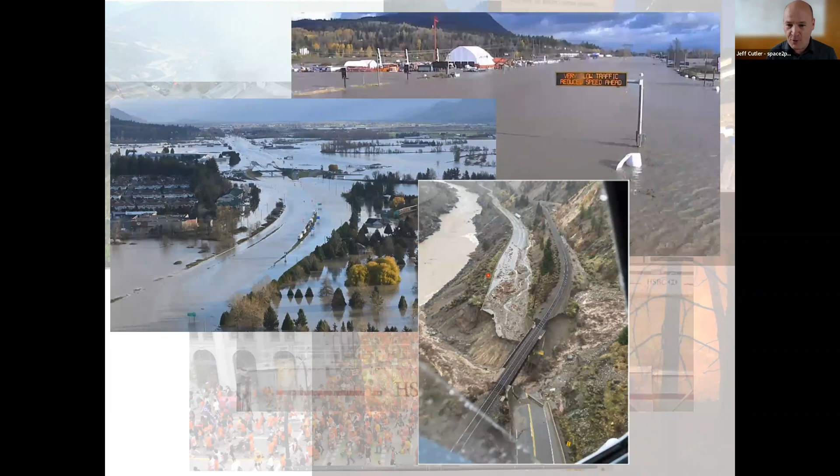Then in the fall, I'm sure you heard about a lot of the flooding events that happened here. Basically, Vancouver was cut off from the rest of the country by ground for a number of weeks, really starting to bring to life a lot of these climate change impacts we've been hearing about over time.

Then to cap it all off, in December we had record low temperatures - the previous low was 50 years ago. So in the same year we had record high and record low, really unusual for Vancouver, which is more of a moderate climate.

Just to give you a brief history of space2place, I've identified 3 phases of our company. We started in 2001, and some of the early projects were private residential projects - part of that is when you're starting your own firm, those are some of the easier projects to get. Another thing we started to do at that time was skateboard parks, which as a new firm was an advantage in some ways because we didn't have a lot of competition - other firms weren't that interested in it. They're also relatively technical and complex.

They were a way to demonstrate the kind of work we could do, and we were able to leverage that into other types of projects. One of the first projects we were able to really get recognition for was the Garden City Play environment, completed in 2008. I think one of the things unique about that project and how we got it was based on our skate park experience.

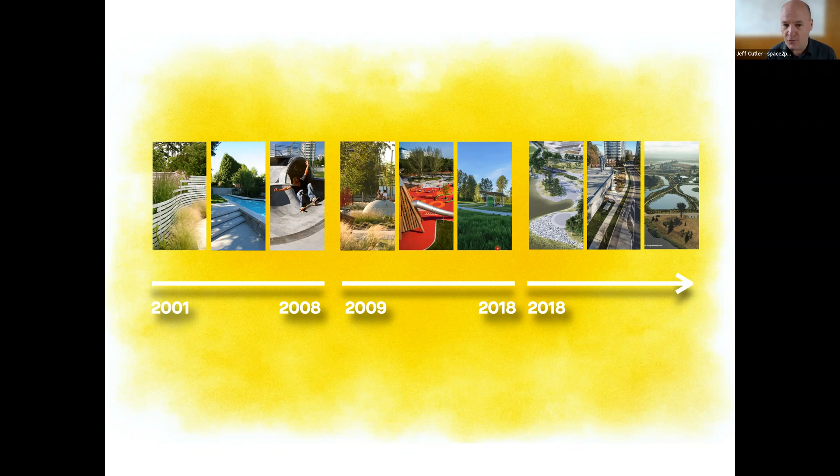So I've identified 5 major points, and what I'm going to do is go through each of these topics, then illustrate with a project that I think does a reasonable job of showing how we're dealing with some of these issues, to give you an idea of where the profession might be going.

So the first topic is embracing change, managing complexity. We have all of this uncertainty. I went through all of these weather events we had in the past year. Of course we have things like COVID that are changing things dramatically, changing the way people are working. And just in the past week, we have this major war that's started in Ukraine.

I think the one thing we can count on in the future is that there's going to be a lot of change, and that change is starting to happen more rapidly, in a number of different factors. One is obviously related to the climate we're seeing. The technology we're using is really starting to change quite a bit, providing exciting opportunities to better understand the places we're working and some good tools. But at the same time, there's a lot to learn, and you have to always be upgrading your skills along the way.

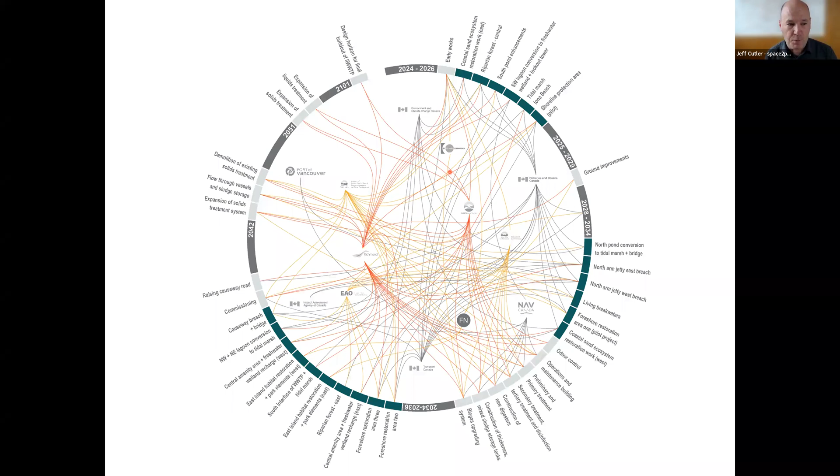Through the project, there are a number of different components. Traditionally, a lot of these things would be done in silos, separate from each other. This project was somewhat unique for an infrastructure project in that we were hired at the same time as the engineers. We were brought in at a very early stage and worked collaboratively through a number of integrated workshops, with a lot of communication throughout the process to develop an integrated design. At the beginning there's a lot of complexity, and as we go through, things become more integrated until we have that integrated whole at the end.

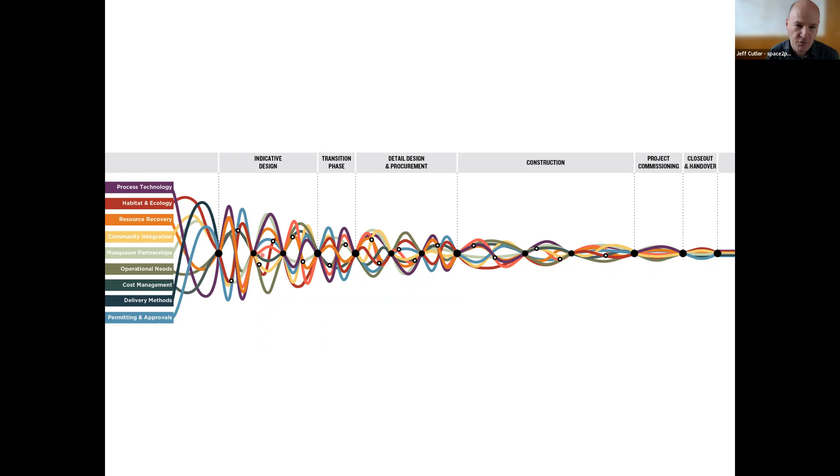It's right at the mouth of the Fraser River, and the watershed is quite large—almost the size of Great Britain, and most of California could also fit in it. It's quite a large area, one of Canada's most significant rivers.

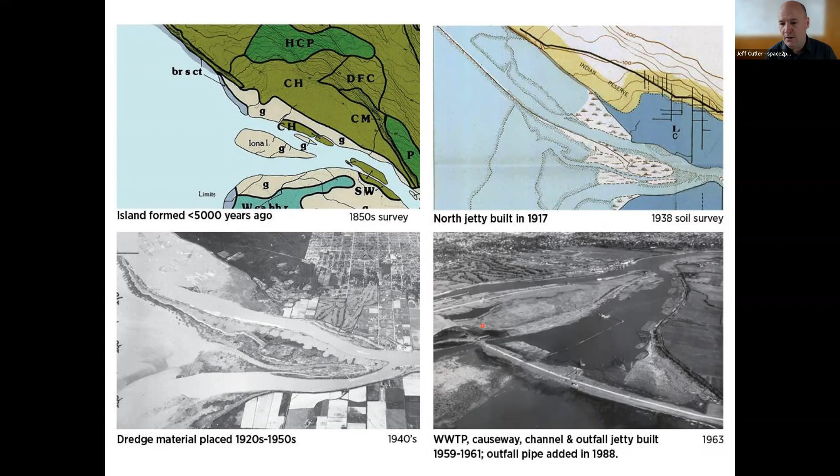You can see there's a jetty constructed with the treatment plant, extending about 7 kilometers out into the Salish Sea. There's about 4 kilometers of what's called Sturgeon Bank, which is relatively flat, then it drops off, and the outfall drops into deep water down that cliff edge.

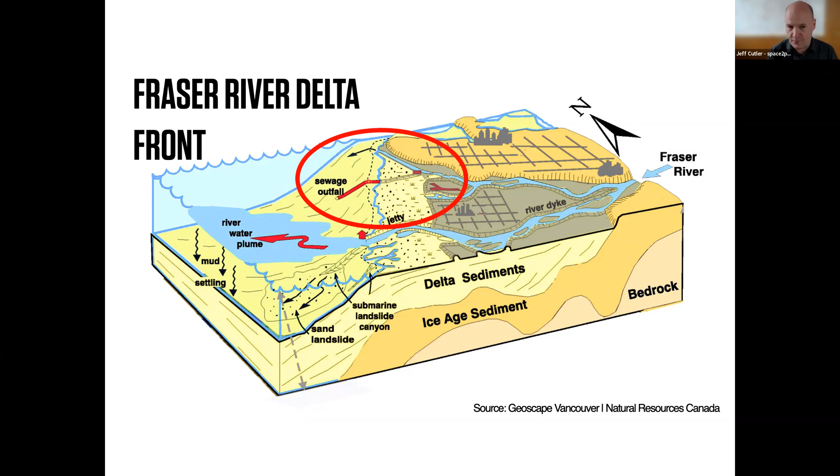One consequence of these marine structures is that they really cut off the estuary from juvenile salmon and their ability to grow in that estuary habitat. There's no connection here, which was a traditional mixing of saltwater and freshwater. Instead, they get channeled out into deep water before they're prepared to do that. So one of the things we're looking at is how do we re-establish some of these natural systems that existed previously.

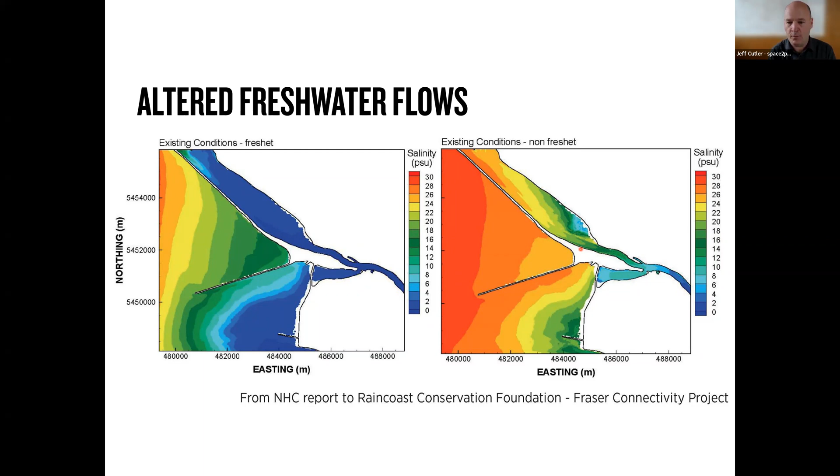You can also see that it had a profound effect on the mixing of the fresh water. One of the things for juvenile salmon is that they're transitioning from a freshwater environment to a saltwater environment, and they get these extreme shocks from freshwater to saltwater, when before it would be more of a brackish environment that helps in that transition.

Also, in the Vancouver region, we have climate change. These are some projections from Metro Vancouver, looking like Januaries are going to start to feel like current Marches, Septembers will be hotter than current Augusts, sea level rise of 1 meter to 1.6 meters or more by 2100, less rain in the summers, which are generally quite dry, but more rain in the fall and winters.

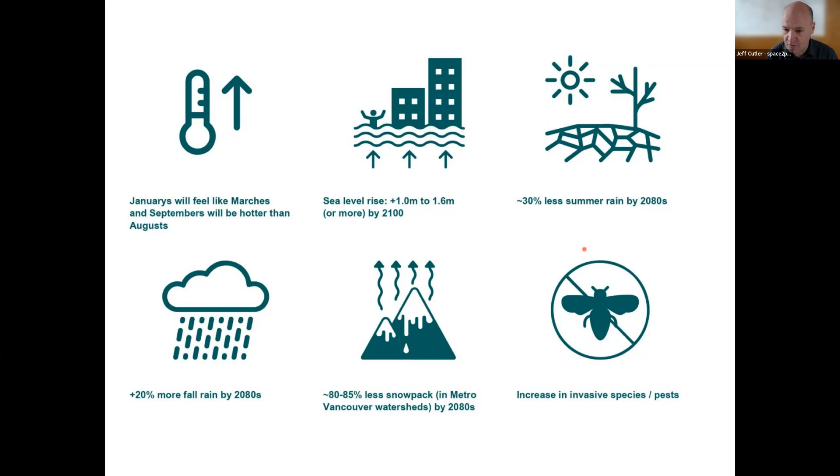Essentially it's going to make events more extreme than what they currently are. Also anticipating less snowpack in the Metro Vancouver watersheds, which will have an impact on our drinking water, but also a lot of the vegetation here, and also an increase in invasive species and pests.

This is looking at the island itself, with a projection of 1 meter sea level rise, and you can see quite a lot of the island is actually quite vulnerable as a current condition, as well as a lot of the surrounding areas. This is a big issue in the Vancouver area, and I think landscape architects have a role to play in this adaptation of our landscapes to help adapt to the sea level rise.

Also, one of the important things in working in these complex projects is having clear goals and principles. This is really looking at nested scales, where we have enhanced terrestrial and freshwater habitats at the island scale, restore estuary health at the more regional scale, and at the Salish Sea level, improve water quality, primarily through the treatment plant itself. Also looking at connecting people to nature, fostering resilience to sea level rise, and integrating Musqueam cultural values and interests. The Musqueam are right across the river from the current site.

So this is the Musqueam First Nation right across the river from the existing site. This is the existing plant right here. There's a regional park at this end of the site, sludge lagoons in here, a biosolids pile, intertidal marsh, and then this is the causeway.

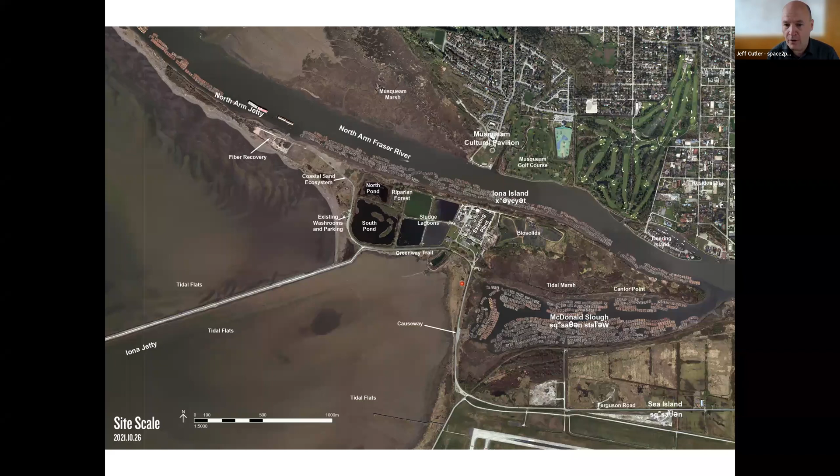Then we can see how that evolves and changes in our proposed design, where the new plant is being built on the site of where the biosolids were. We were quite involved early on, helping to frame the project, helping the whole team understand the context they're working in, and also identifying ecological constraints that help identify where the plant is sited on the island. We had quite a bit of back and forth with the engineers on that.

The sludge lagoons here now are converted into new freshwater wetlands and intertidal fish habitat here on the north side. We have breaches proposed both in the causeway and the north arm, and a couple breaches on the north arm jetty to allow for that better connection and fresh and saltwater mixing between the river and the ocean.

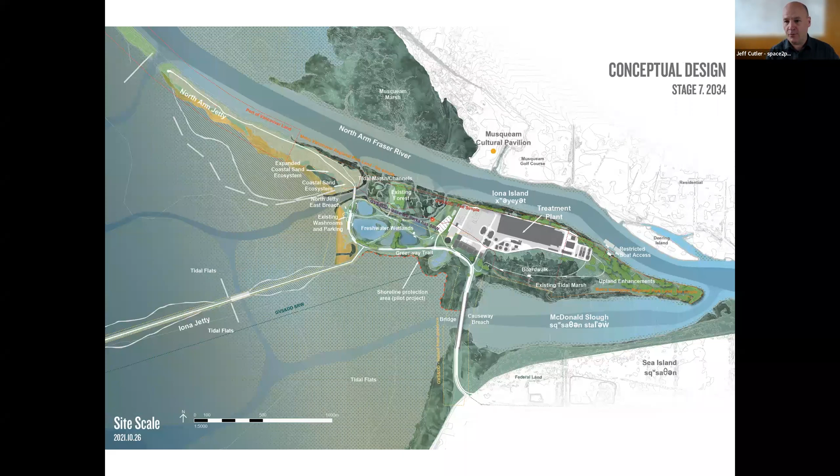And this is all going to be done over a longer time scale, you can see from 2025 to 2035. On a large project like this, it's important to parcel it up into smaller pieces, and so we've identified 20 ecological projects to happen over the course of the project. All of these have been budgeted for and are happening in relation with the plant.

I think one of the things that's important on these major infrastructure projects is a lot of projects get held up in environmental and regulatory issues. One thing to Metro's benefit is they invested in this work early on in the process. Part of the thing is a lot of these ecological projects are enabling the larger project to happen as well, so everything is interrelated and is an important part of the overall project.

And it's really about restoring health to the Salish Sea. While the water quality treatment is an important aspect to that, a lot of these improvements in and around the island are also contributing to that in a meaningful way.

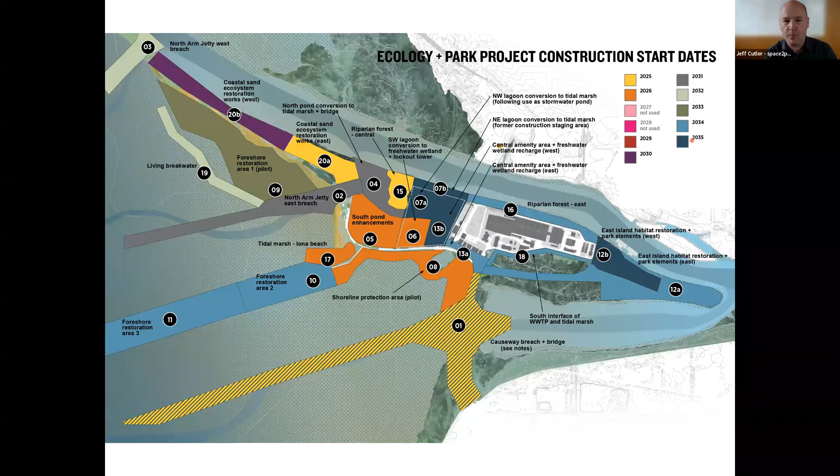These are the ecological projects happening across the island, and also managing for flood protection. The plant site itself will be raised to about 7 meters. Right now it's about 3.5 meters, so quite a lot of fill is being brought in.

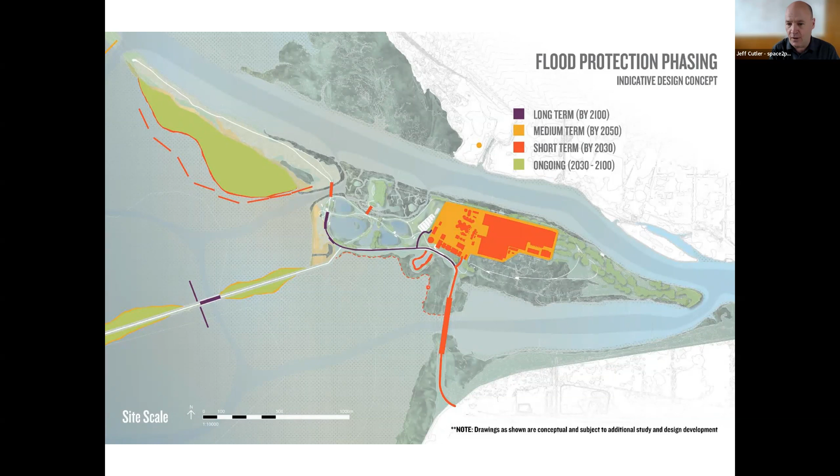You can see the relationship with the Musqueam across the river. One of the things important in speaking with the Musqueam is maintaining their traditional views across this site to the mountains of Vancouver Island across the way. So we worked closely with the engineers to keep this space open and not have treatment facilities on this side of the island.

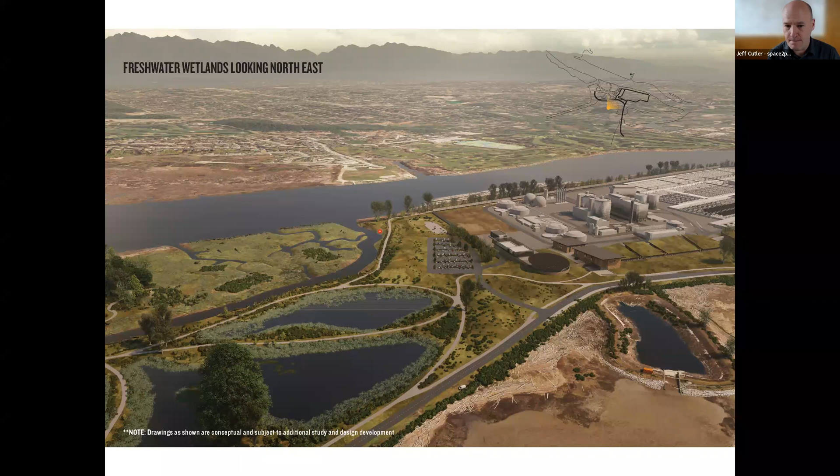The next point I'd like to talk about is decolonizing design. This is another trend that is really emerging, and I think it's fairly new to me, but it's something we're starting to engage with on a number of our projects, and an important consideration moving forward.

Some of the aspects we need to consider: including more voices in the design process, including Indigenous peoples whose land we're living on, and who have a lot to contribute. Also making these places feel more inclusive, better representing other cultures and the communities we live in. It's important to have that diversity and mix of perspectives and different cultures included in the design.

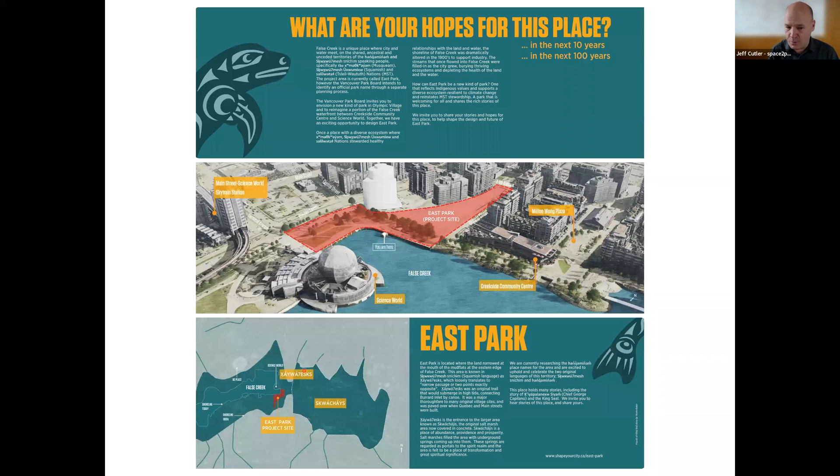One of the things we did was work with Sky Spirit Studio, Indigenous design consultants who are part of our team. They developed this King Seal graphic, which is part of a traditional story related to this site, helping us understand this place beyond the colonial history. We tried to get a deeper understanding of what it was before it was so modified in the last 100 years, including Indigenous place names and activities that happened here.

This is Sierra Tasi Baker from Sky Spirit Studio, who's been working closely with us on this project.

The next element here is go slow to go fast. One thing we're finding with these complex projects is you can't just jump straight into design—you really need to take time to understand where you're working and what these spaces are.

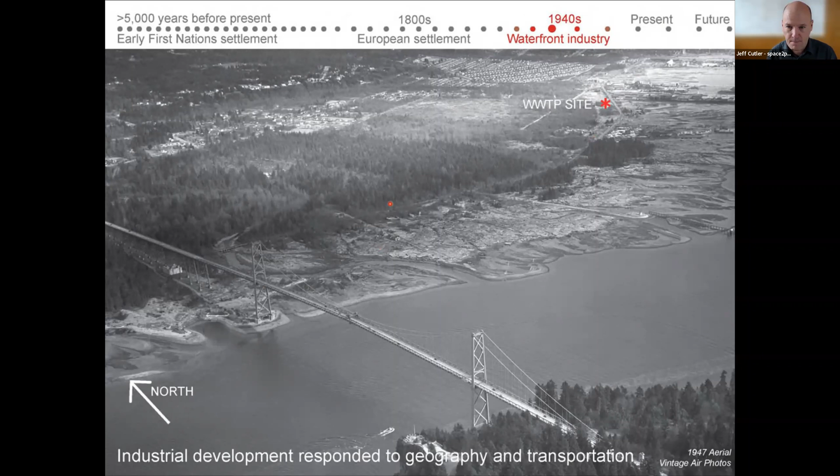This is a photo from the 1940s showing the wastewater treatment plant site—much different now, but you can see the mudflat habitats that previously existed there, and the railway running through. This is what the area looks like now, with a more industrial waterfront, but we tried to understand what it used to be in the past.

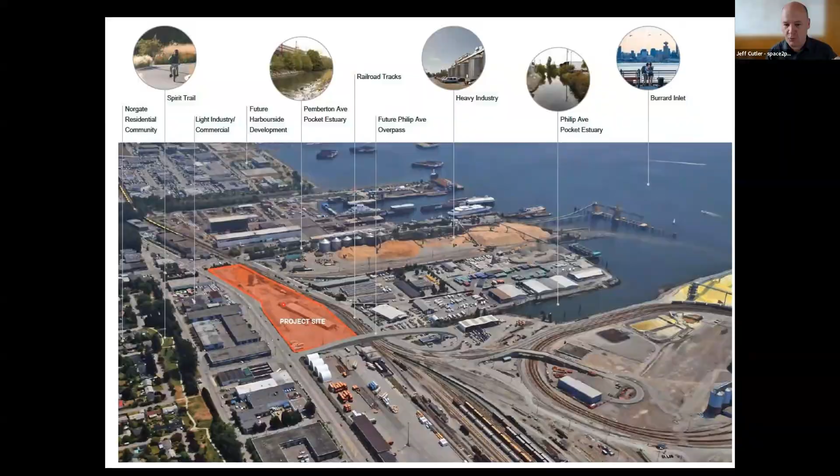There's also a residential community not too far away, so how this fits into the community was quite important. Through this, we had multiple workshops with both the community and the engineering team, Metro Vancouver staff, and our team, called the Architecture and Community Integration Team.

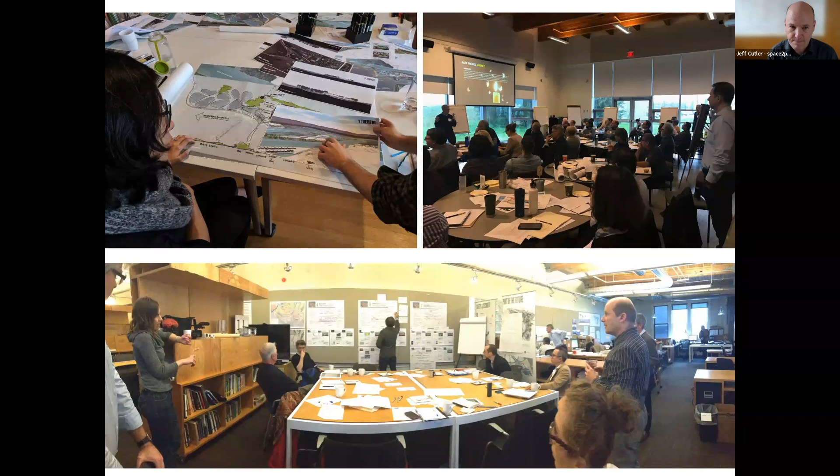And through that, we developed these 9 candidate concepts, at a very high level, as a way to test different ideas and how they fit into the site.

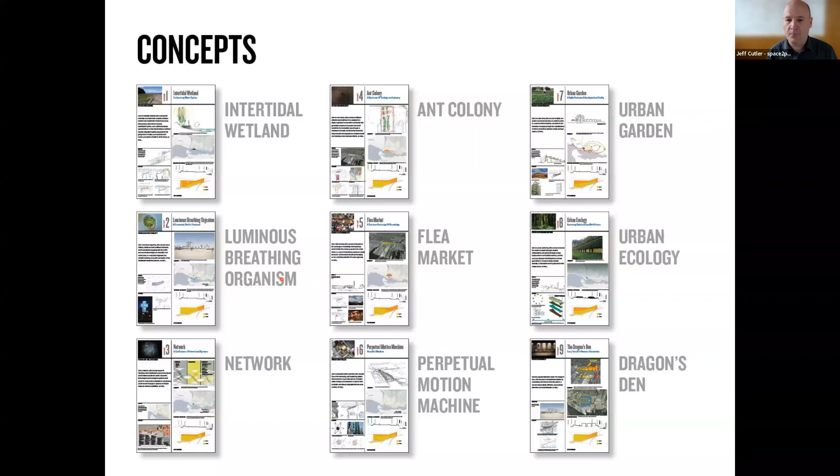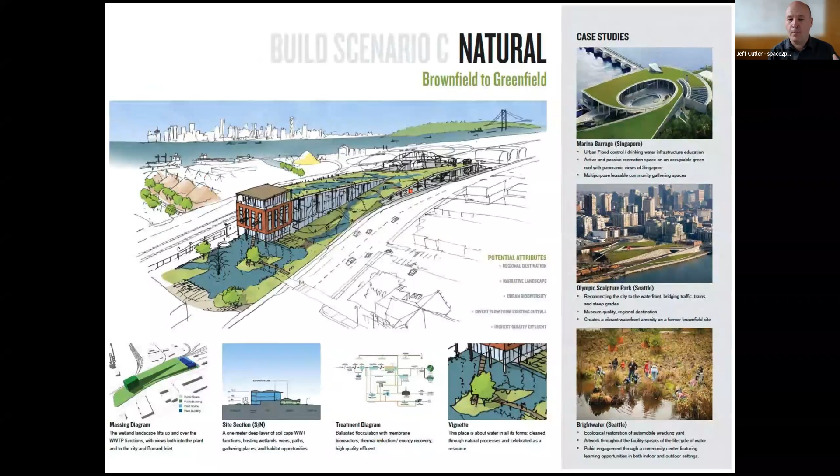From there, we arrived at 3 candidate concepts. This one had more of a natural focus to it. This one had more of a community focus. And then this one was really about maximizing resources that were in the area, looking at everything as a resource, and what that looks like as a concept.

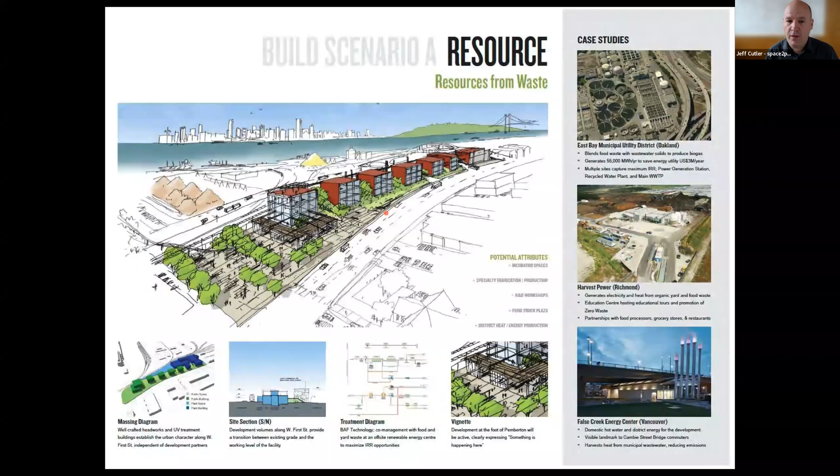Through that, we went through what's called a structured decision-making exercise, where we had all of these different objectives, and we gave each criteria a different score to help evaluate which one scored better than the other. And then from there, we arrived at a preferred concept.

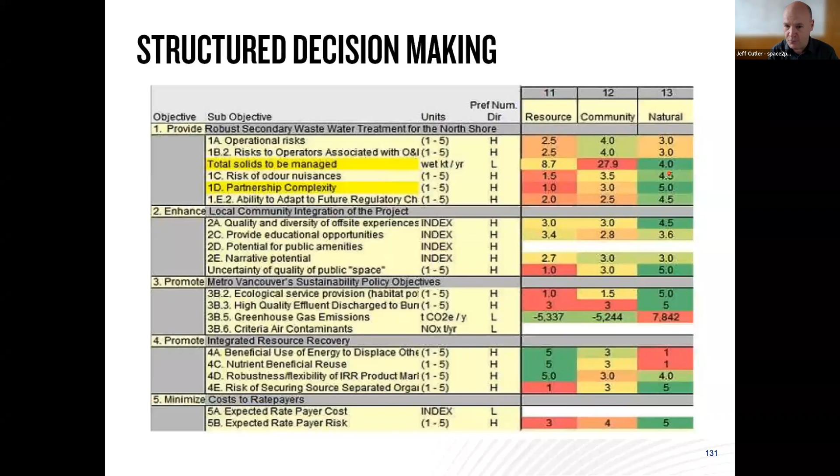So this was the preferred concept that we had, and looking at some of the architectural strategy of how that transforms what might be more of a traditional treatment plant into something that is a little bit more knitted in with the community.

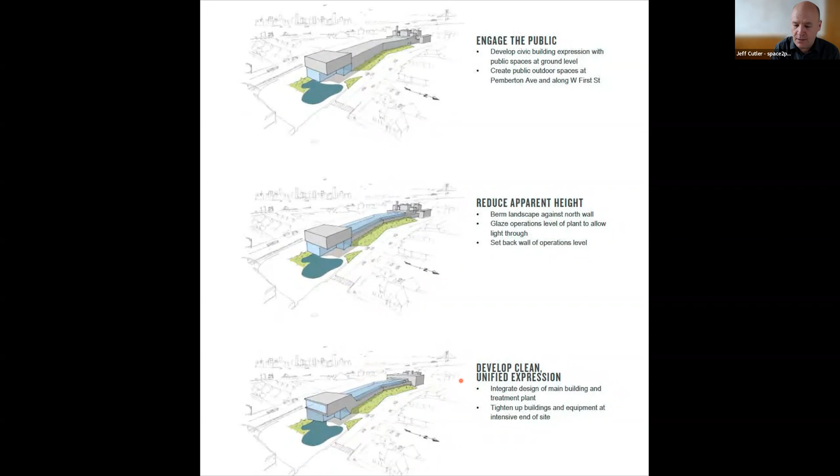This is the organization of the equipment across the site. This is much different, it's almost like a factory. So it's a much different expression of a treatment plant than what you would see traditionally, I would say.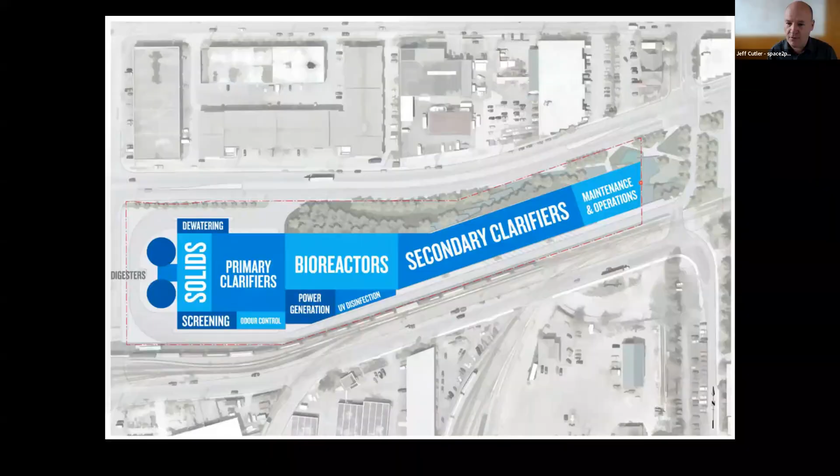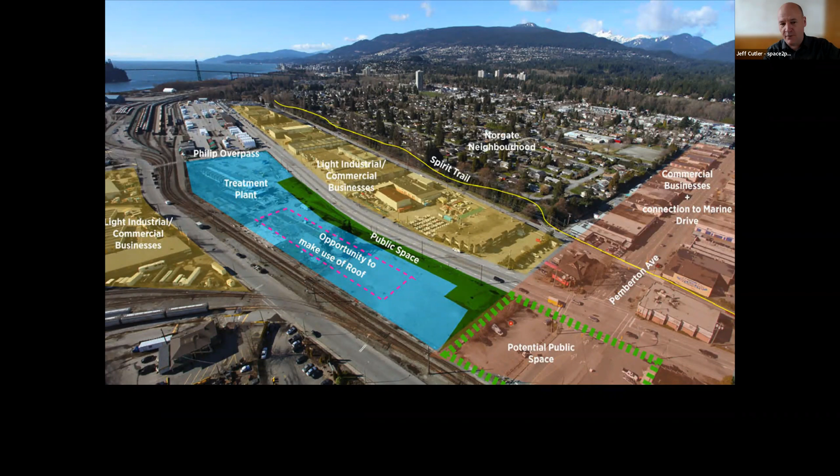And having the public end of the plant down here, this was connected, there's kind of like a commercial core here. So this really made sense to identify this end as a public space. If we weren't involved with this project, they would have likely had the dirtier end of the plant down here, given its access to roads and everything. But our team really helped shape the organization of this and how it relates to the community.

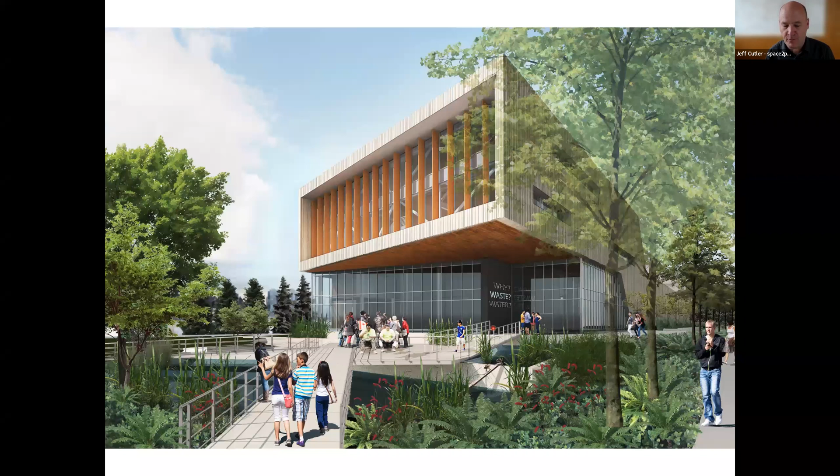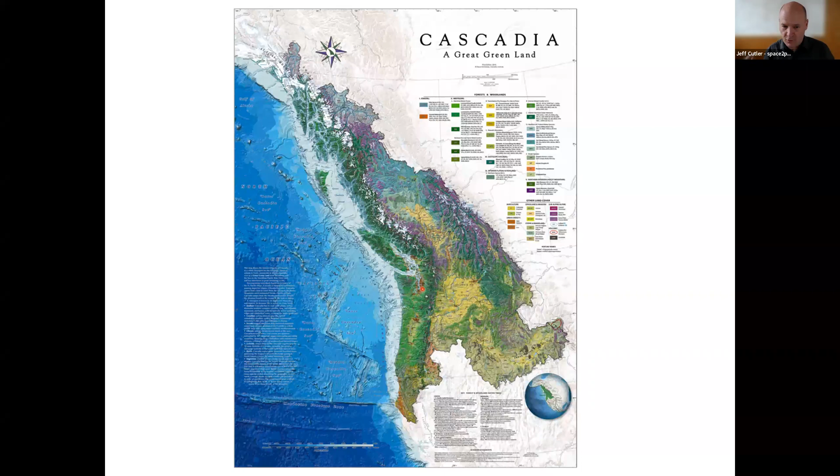The next one is bioregional design. In the past there was a lot of globalism, and I think what we're starting to see now is more focus on bioregional design, where we focus on what I call bioregions. This is the Cascadia bioregion, looking from Northern California, Oregon, Washington, and British Columbia, touching up into Alaska. There are these real strong characteristics that these bioregions have, and with all of these complexities and ecological components, it's really important to understand the places that you're working.

So an example of bioregional design that we're working on is this Surrey Bend Regional Park, which was completed a few years ago. It's quite a significant regional park within Metro Vancouver, and it's within a large bog.

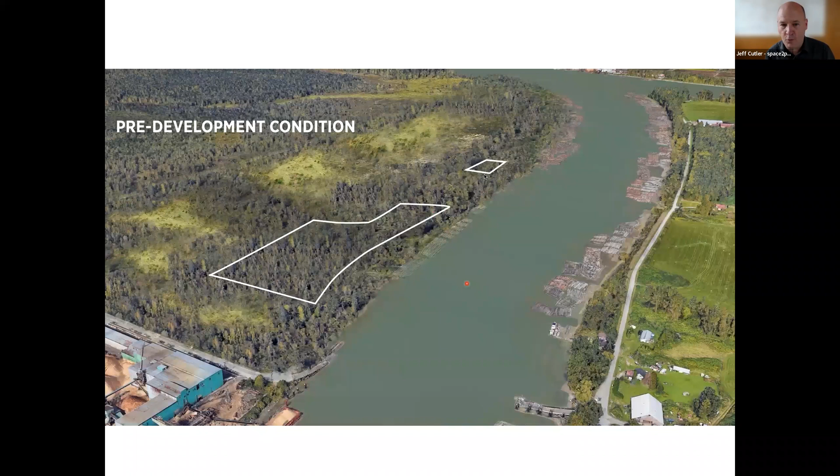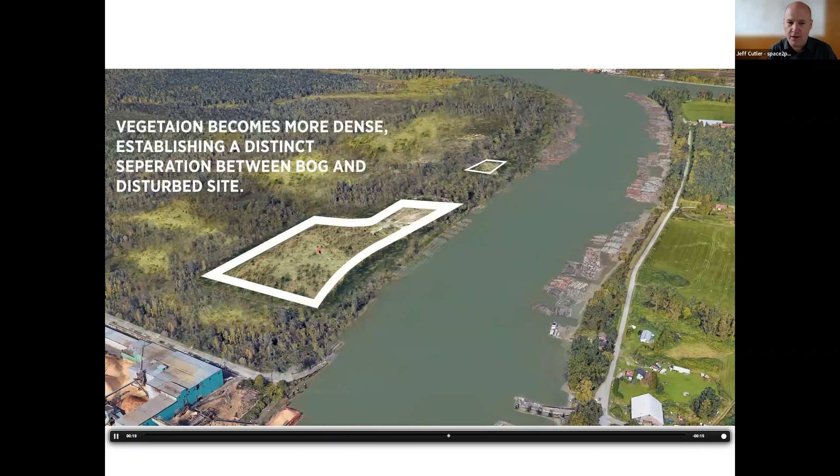Early on, the site we were working on was disturbed and prepared for industrial use, but it never was developed. It sat fallow for about 20 years, and since everything was so compacted, nothing ever really grew. So we developed this park scheme for the site as an entry into this larger environment.

One of the things was, when they cleared the site, it created this dense row of trees around it. So we poked these holes through to connect to the larger landscape around it.

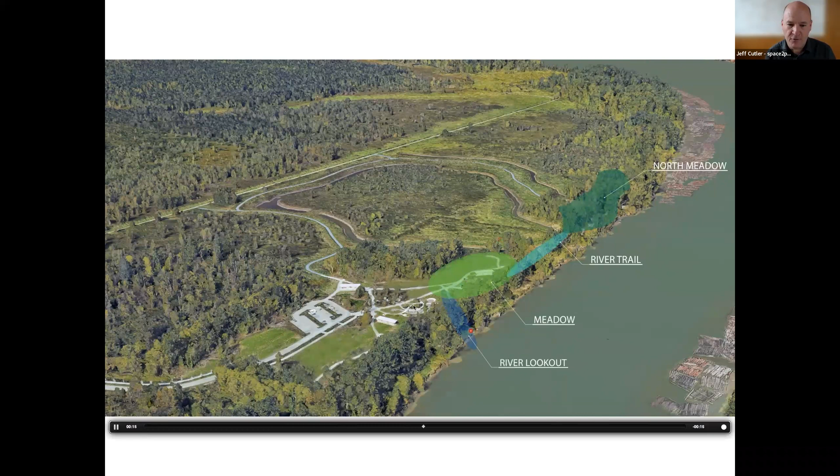There's also fish channels in here that were done as part of a separate project, but we were involved with the trails throughout the bogs there. This is showing some of the programming happening across the site, with the North Meadow, the River Trail, the main meadow here, River Lookout, natural play area, wetland, field, and parking. This is kind of the arrival experience.

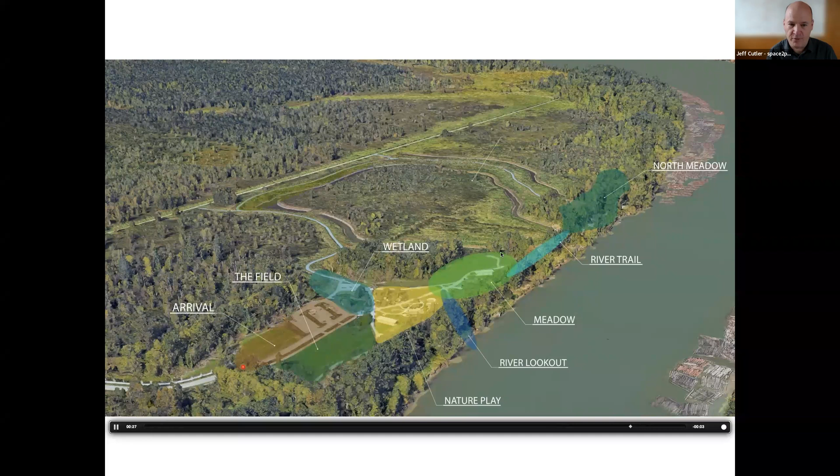One of the things we really tried to establish with the site was embracing the natural seasons and the change with this, really trying to design a site that has a different character and is integrated with the ecology of this area.

The last one I want to quickly touch on is joining the dots. What I mean by that is, especially in a lot of these climate change adaptation projects, you have a lot of specialists that are very focused on their field, but they don't really know that much about how their work relates to other fields and other connections. So one thing I think we're finding our role on these projects can be is that we know a little bit about a lot of these different things, and we know enough that we can connect the dots between these different specialists and help create a more integrated project.

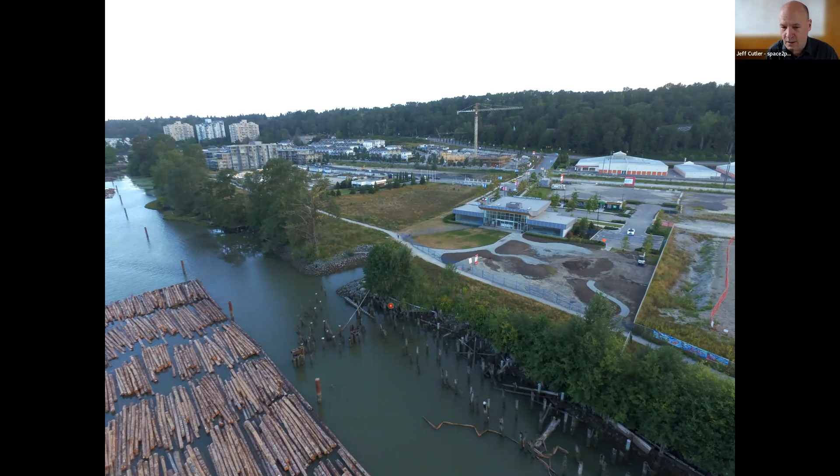Initially we were looking at bringing stormwater from above here into here. That proved to be too difficult to get past the railway here, but this is becoming tidal channels to provide habitat and bring that river experience into the park. As well as having a lot of interesting experiences along the shoreline, but also integrating flood protection through the park design.

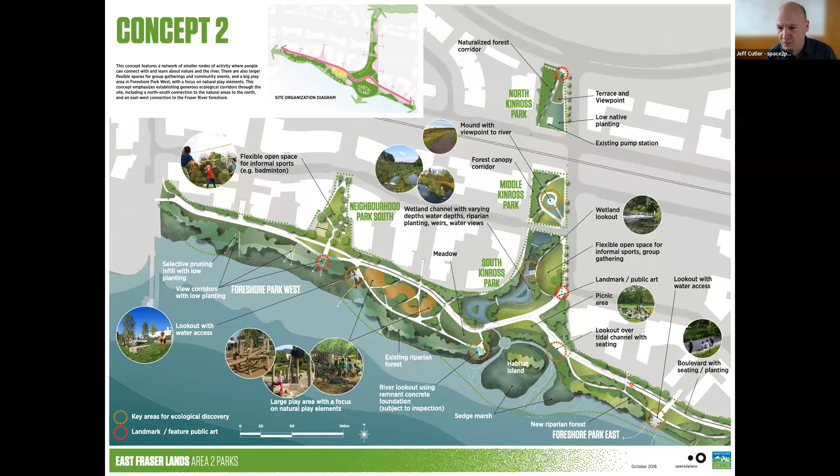So you can see here, this is a dike that moves through here, integrating that flood infrastructure into the park design and almost creating this new type of public space that integrates public space elements and infrastructure. We're working with many different departments like engineering, environmental regulatory authorities, and community members through there. So we have all of these different pieces.

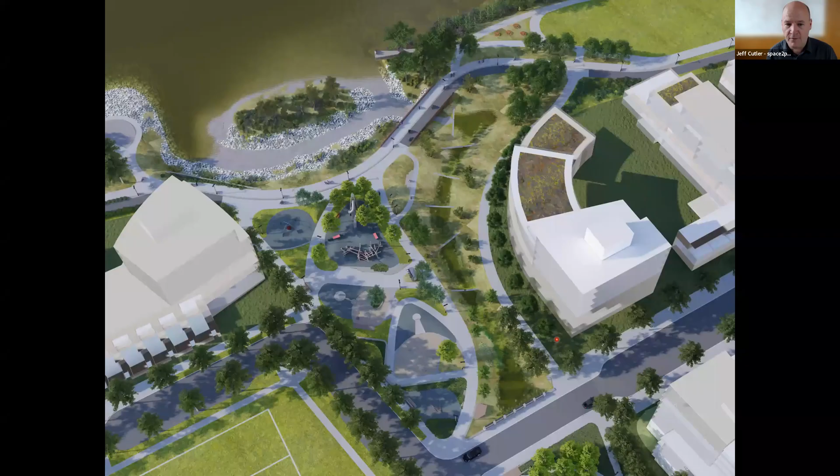As landscape architects, it's almost like an undefined new territory that we're working in. But I find the skills that we have as landscape architects are quite suited to working within these new territories. So this is an example of the proposed design at the central part of this park, where the flood protection is integrated through the park. You can't even really tell where the flood protection is, but it's all been designed in careful consideration with the engineers of how that's integrated into the park design.

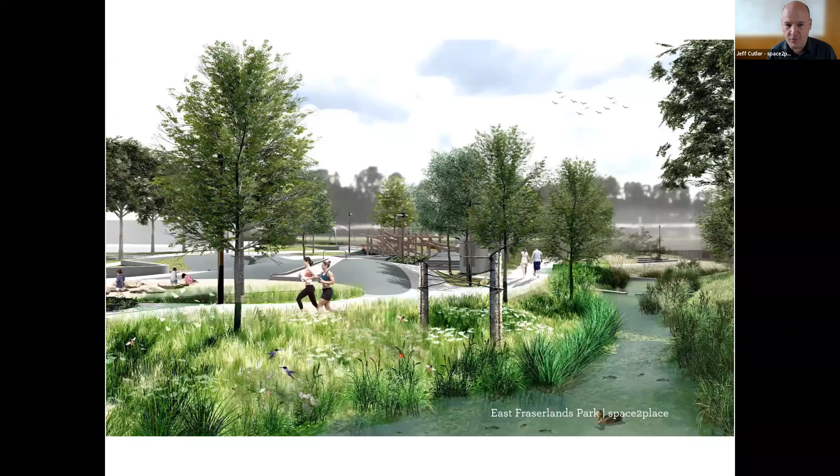So this is looking at that tidal channel with the playground on the other side. Some images illustrating the park design. This is the dike that moves through here, and then it goes up and around and continues through here.

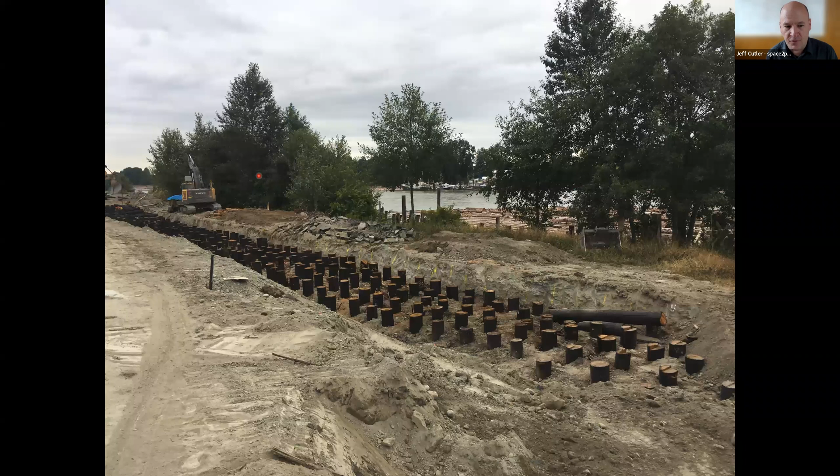And then this is just some photos of that dike construction. So the park is under construction, not fully complete, but a lot of the flood infrastructure is in. This is all piles required to make the dikes seismically stable, since we're in an earthquake zone, so that's an important component for the ground improvements. The dike construction here, we'll build the park on top of.

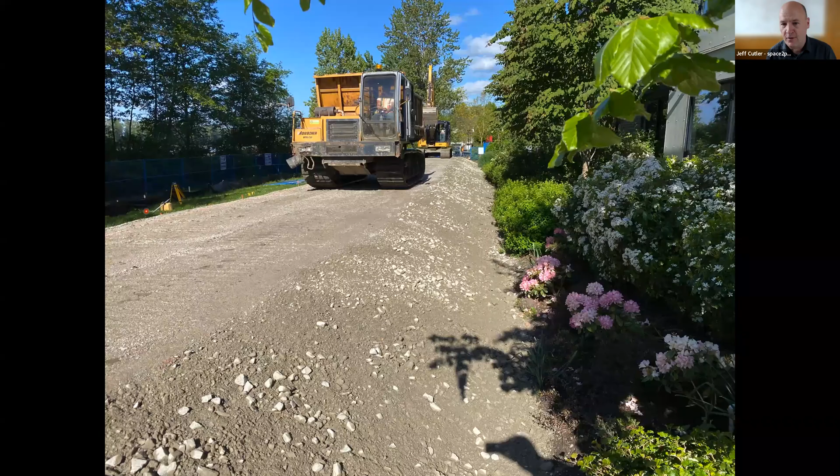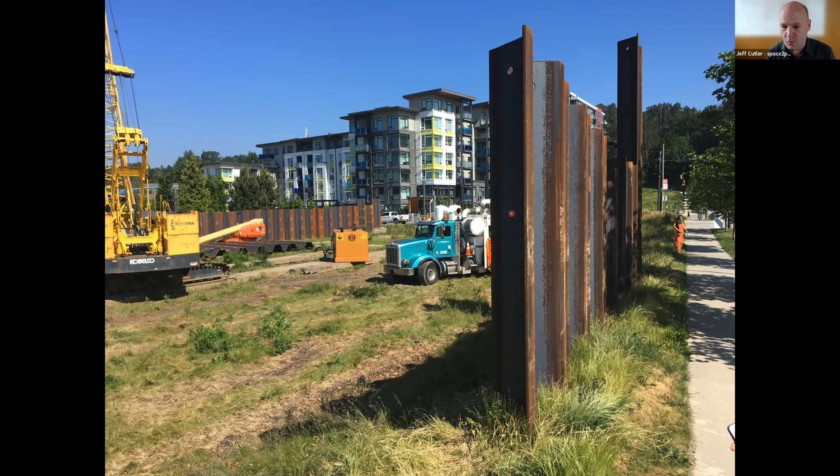And then as well having different types of non-traditional flood infrastructure where we're going through those park elements, we have these sheet pile walls here, which will provide that flood infrastructure as it's going through that play area. So you can see how the shape of it will respond to our park design.

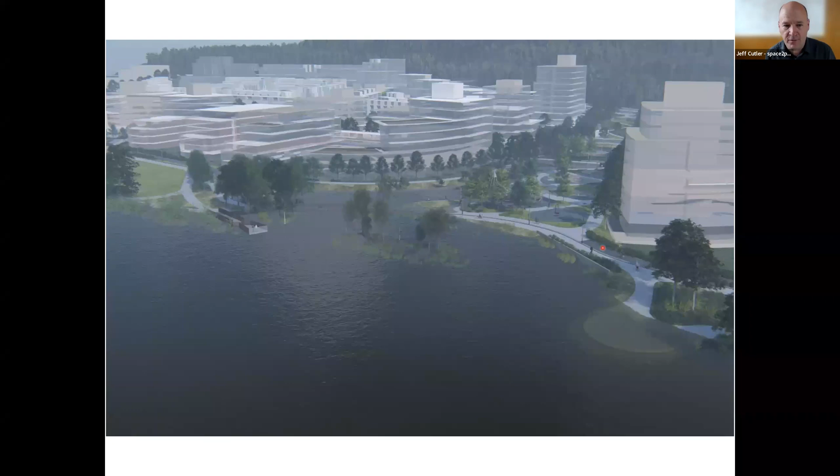And then just a few images showing how the flooding works. This would be up to a proposed 2100, one meter sea level rise. So you can see how the park is designed to flood over time and still protect some of the neighboring residential development there. So that's all I have.